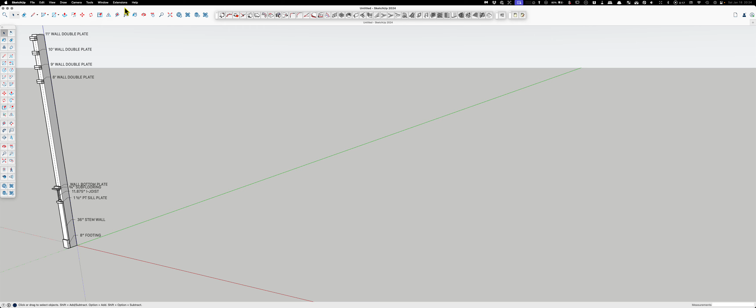I wanted to show how powerful Sketchup is because I ran into an interesting scenario the other day. Let's just build it and we'll see how long it takes. I have no idea what this will take.

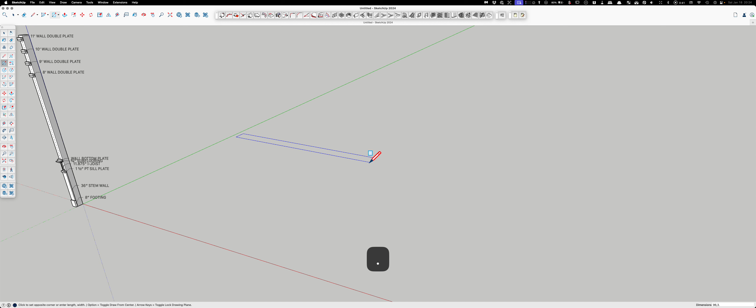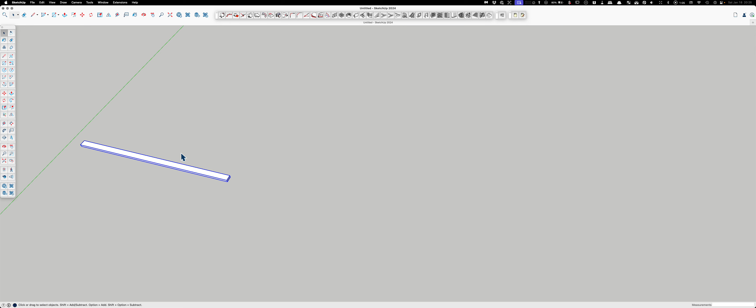Let's go like this. I want this to be... so I'm drawing a wall this way. And then there was another, let's see, let's do it this way. Maybe I can do it this way. From this point here, I need 3'8".

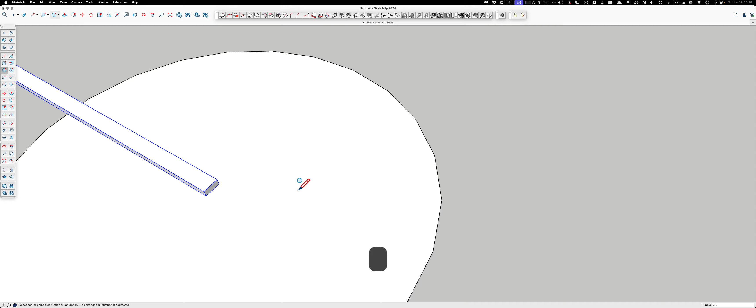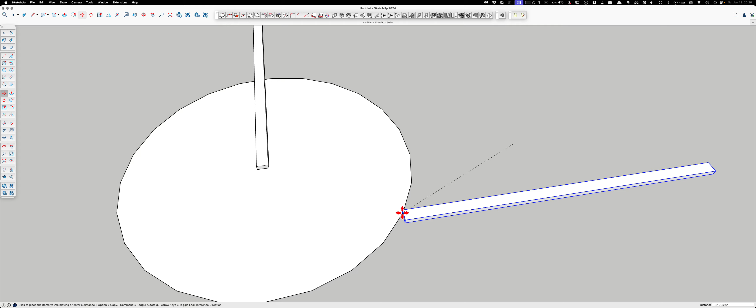We're going to delete that in a second. Yeah, the difficult thing was this was not a 45. So,

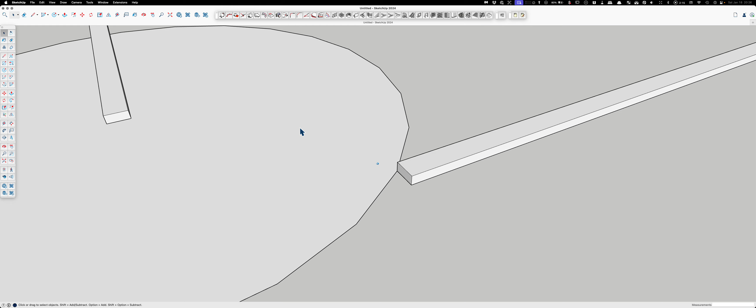Anyways, we're going to do that. And then do a rectangle. Let's see. Actually, I need to do it like this.

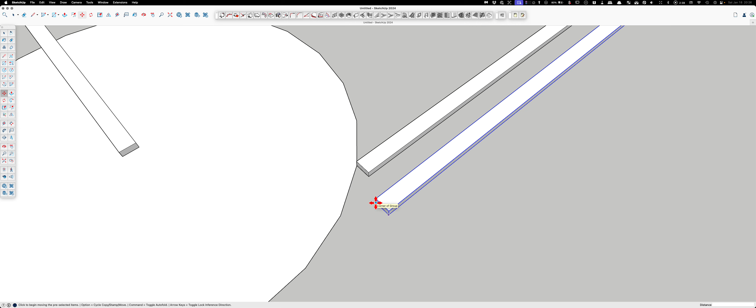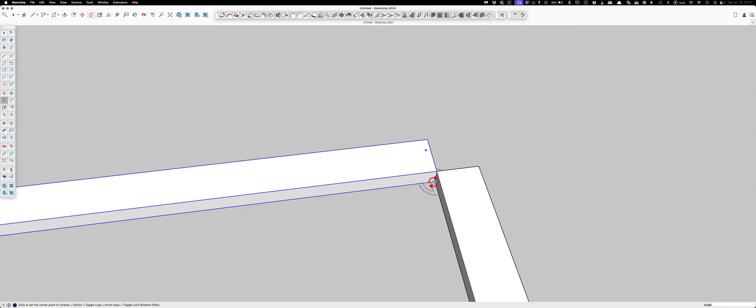I think I can get rid of the circle now. And we'll do Q for rotate up axes. Okay. I think he went this way.

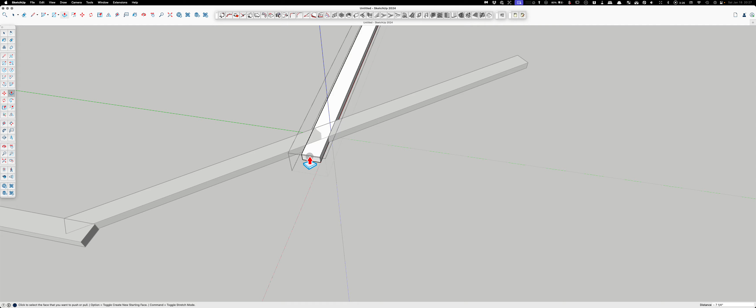By the time I was able to get to work, I had used Sketchup to solve this problem, but I didn't know the actual length. So, Medeek trim. I'm going to try and reproduce what I did. It worked out pretty good. I just didn't know the actual length.

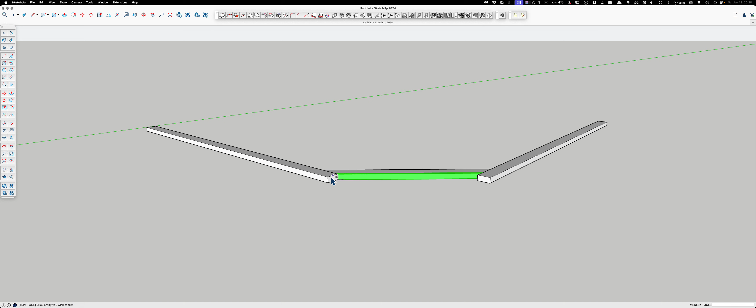I like this tool, Medeek trim. There's that. Okay. They needed 3'8" for a door. So what made this difficult was

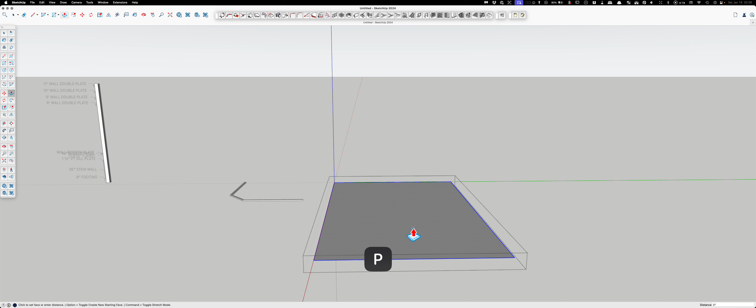Rectangle. G. P. This is under a sloped ceiling. And even it is a strange angle.

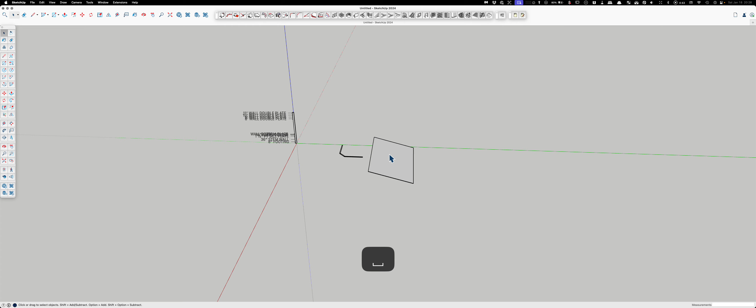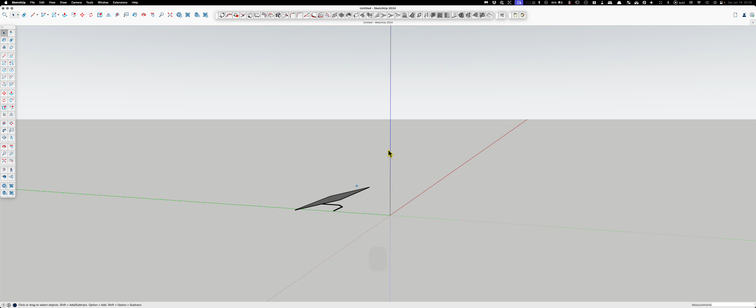There's that. Can't remember. I get used to Sketchup doing, what do you call it? Spacebar to disconnect. And there we go. You know what? I don't need all this right here. And I don't really need these axes.

Okay, we're going to move this upwards. I don't know, say about there. And we're going to leave these plates here.

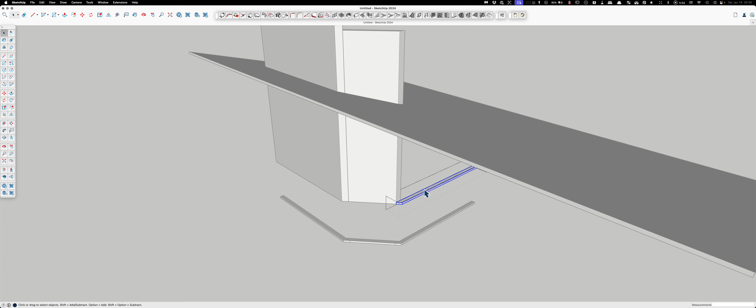This is where the magic happens. Medeek trim. Medeek trim.

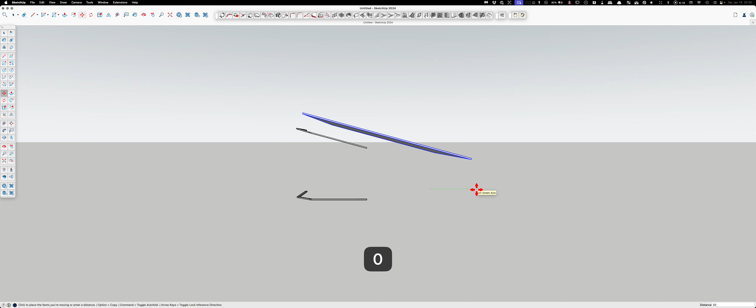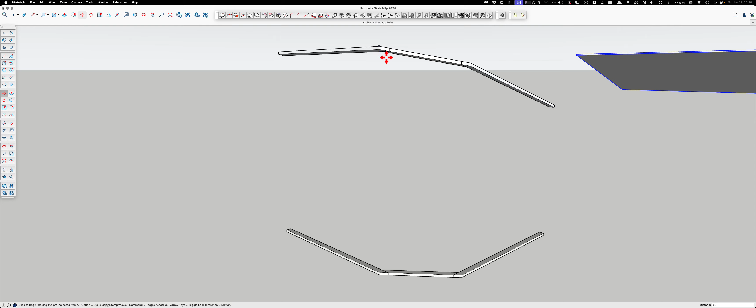I'll keep this around, so what I'll do is I'll just move it this direction 50 feet. So the studs would come up, and I was able to get the exact angle, and this height doesn't really matter right now. What matters is I can do a point laser from there to there, and then I know the compound angle. But

Like for example, let's check this out. Copy. We're going to lay it down over here. V.

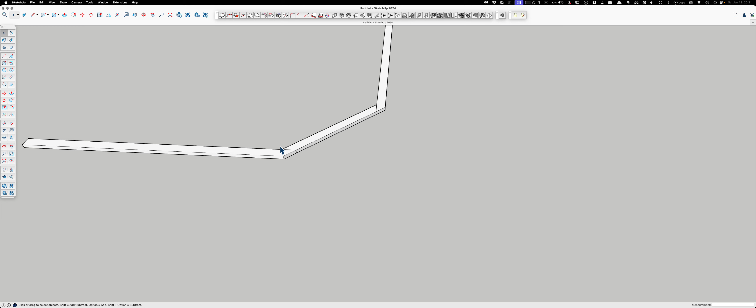And so I need to straighten it out. So I'm going to go... okay. I'm going to go Q.

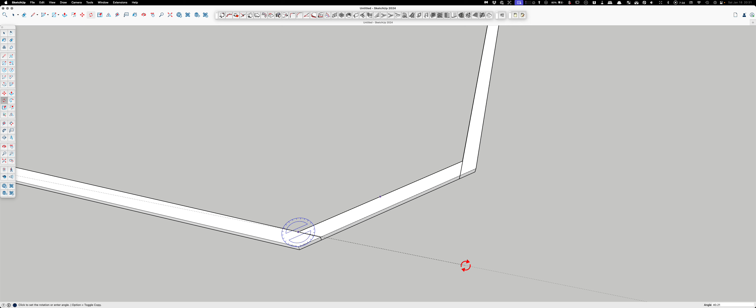Okay, so this is now rotated in that plane. Now I need to rotate it. Let's see.

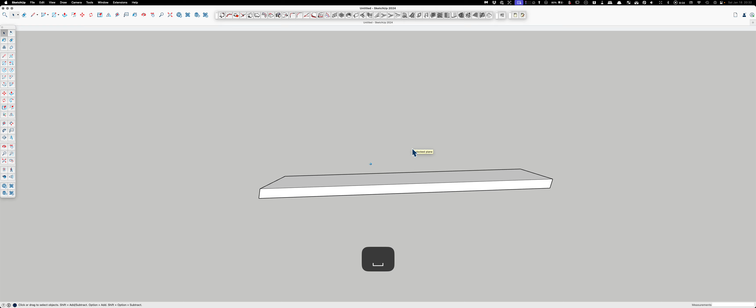Yeah, yellow or green. Looks yellow to me. There, now I think, look as I look at the horizon. Yeah, so it's flat. And now I just got to flatten it this direction.

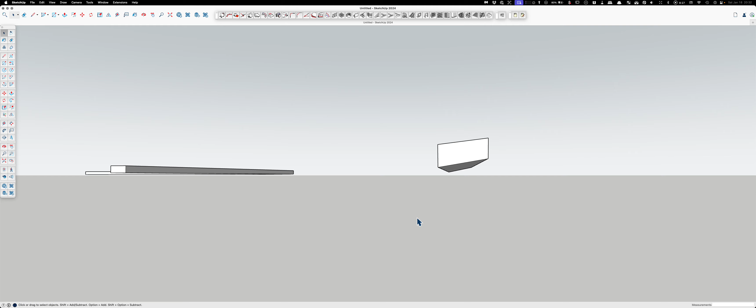And the hard part about this, let me think, how did I do this last time? Yeah, hang on. You know what I did? I think I drew a line this way.

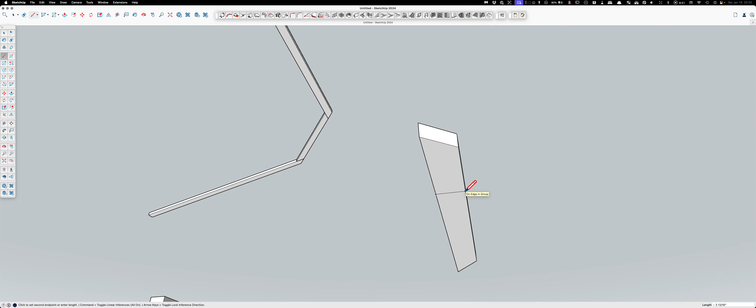See how it wanted to go yellow? Whoops. I can't tell if that worked. That's not what I wanted.

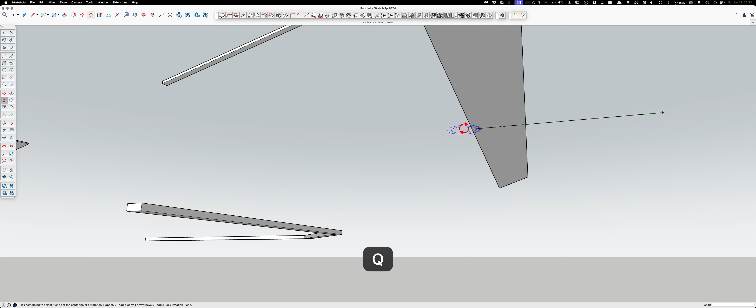So let's do Q. Let's do this object Q. We're going to do, well, not green.

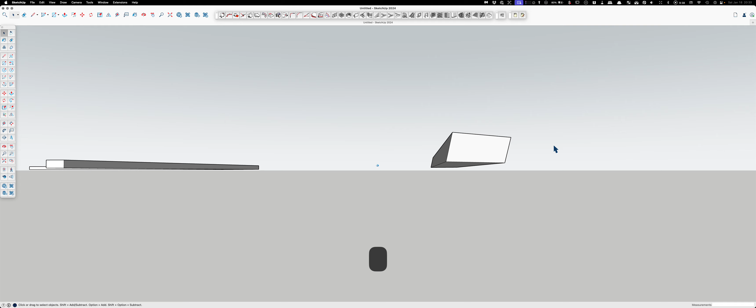I think that's how you do it. So now I have this board laying flat on the ground. And then what I did was I made a rectangle. I think I made just a big giant rectangle.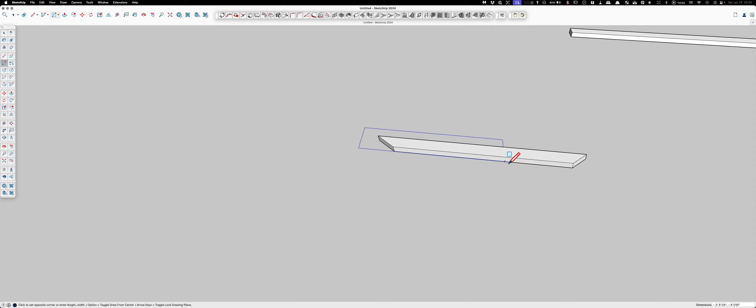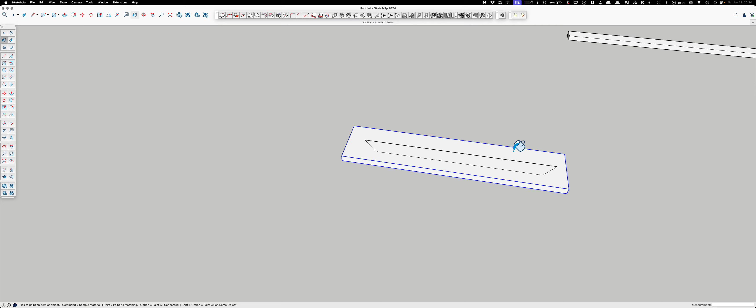Yep, and then push pull to the top. 1, 2, 3. G. And then I wanted to see what it was, so I went to colors, something like this at this.

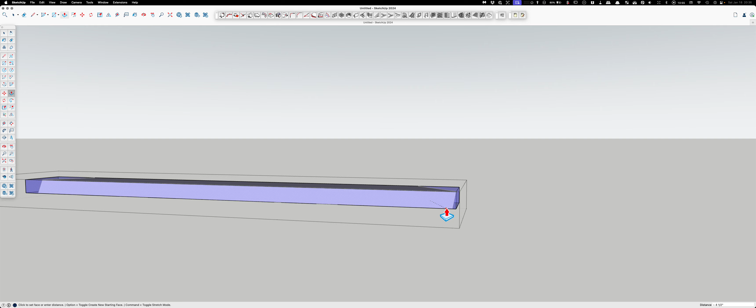So now I can see inside. Yeah, so that's perfect. So now I can go to there, to there, there.

What I'm trying to do is start with a rectangular piece of wood that I would be able to take to a saw and cut. There we go.

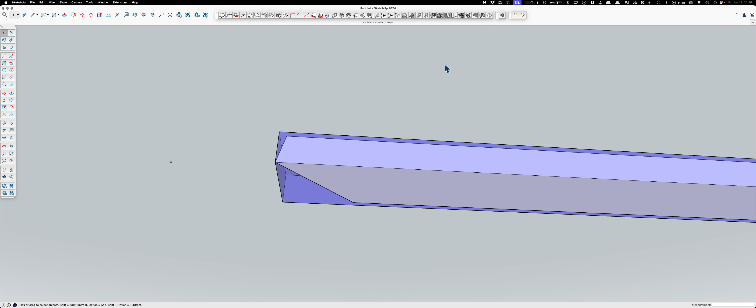So that custom piece is fully encased in this bluish thing. And then

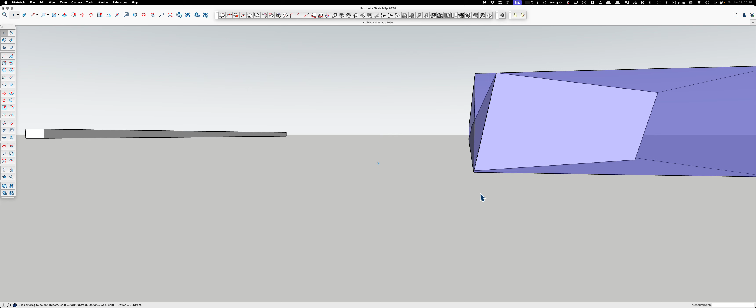I was able to figure out the rip angle. So what that would be is a line from there down to this corner. And as you look straight down the edge, that lines up. There's an angle tool.

Oh, brother. And it wasn't in Extensions. Oh, I know what it is. It's the protractor.

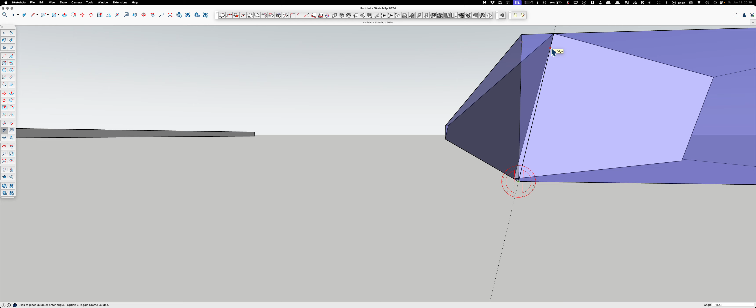Yeah. You go here, here, and then you come over here. So that's 11.48 if you look down in the bottom right. So we'll go check the other side. This would be the angle you would put in the table saw, 11.48.

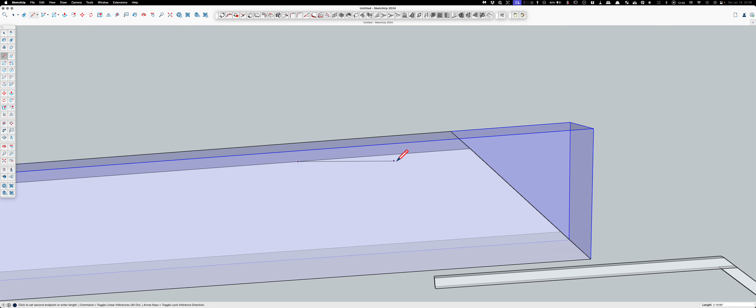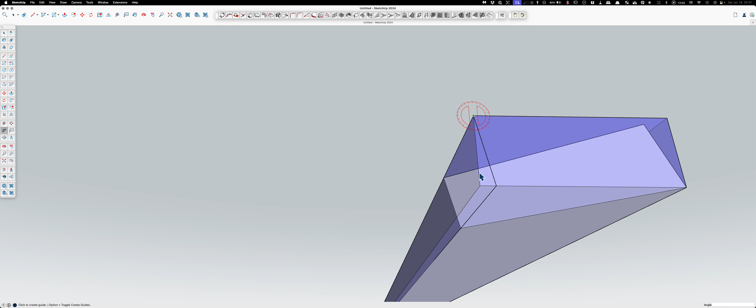All right, so I went into X-ray mode so I could grab that. So then I can go line from here to there. And then I can do protractor.

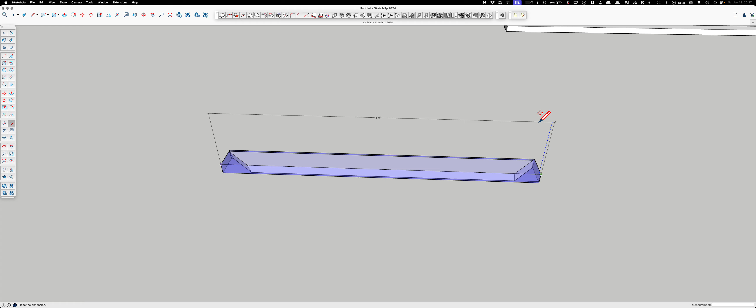So 11.48. So that's going to be what you set your table saw on. And you might as well cut yourself a board. Let's see how long this is.

So grab you a board that's like 4 feet or bigger and run it through the table saw. And you'll need to start wider than this because when you do these parallelogram, you can't just grab a board that is only this wide, 3 7/8. So you'd have to set the table saw at like 4.5 or 4 3/4, and then tip it over to 11 point, whatever that was, 11.48.

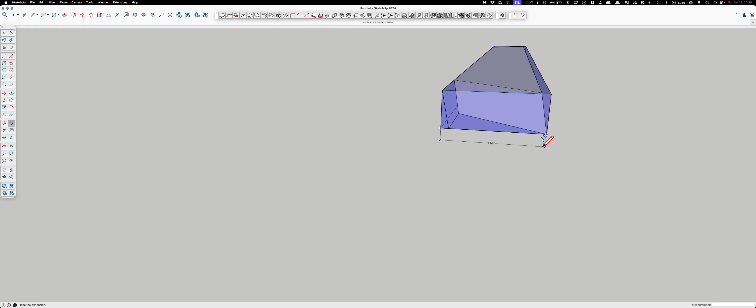Run it through, and then flip it over and dial it back to 3 7/8, and then it would work. Actually, I don't even know if that's correct. Hold on. I think it has to be this one. I don't know if I'm going to get a dimension here. 3 9/16. That's more realistic. I think that's what it is.

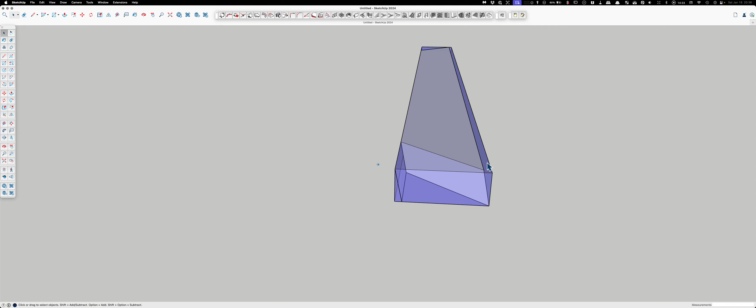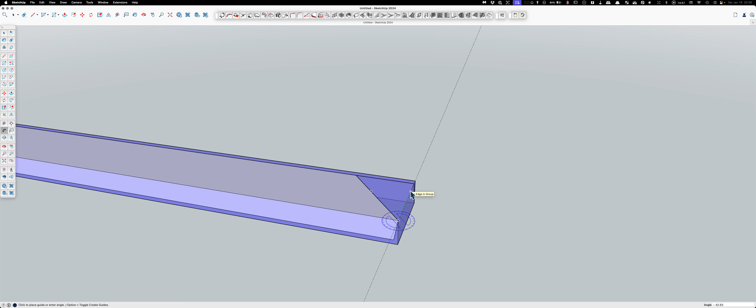That's the only trouble with the Space Mouse, is it's a little herky-jerky.

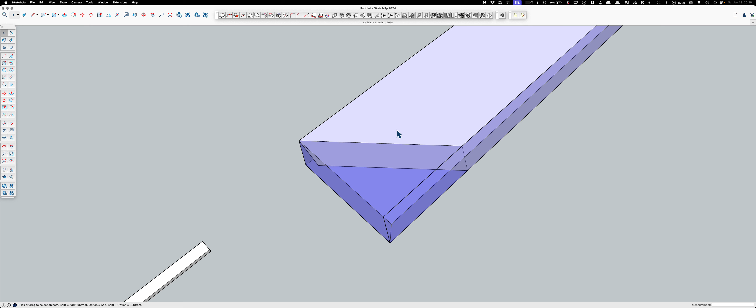X-ray. Line tool. Okay, there's that. Then I can go line from there to there.

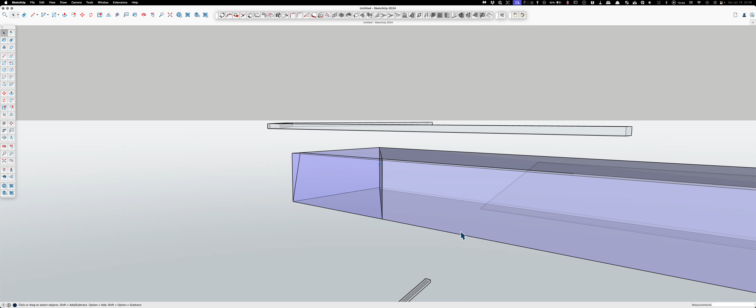Man, does this even have a... You know what? Why are you doing that to me? Yeah, it's got some kind of bevel. Maybe. No, not really. Look at that. When you line it up with the true corner, that's a square cut. What does this side have? Yeah. Man, this Space Mouse is just acting crazy. Let's do...

Oh, you know what? It is going to be a square cut because I know what happened. So yeah, the first time I did this, I tried to do a miter cut 22.5 on the floor and then match that with the ceiling with miter cuts. And so there was some beveling going on. But I'm actually... What, am I upside down? Yeah, there we go.

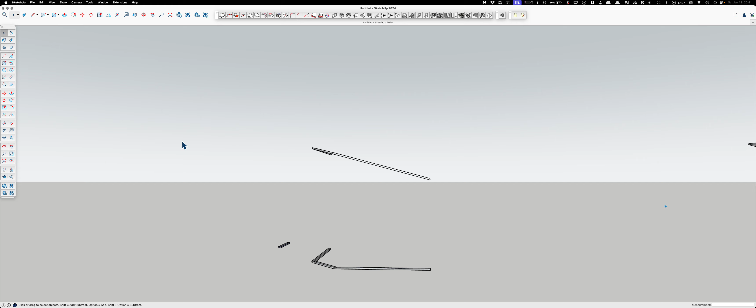So that's got a bevel there. Yeah, this one's got a bevel.

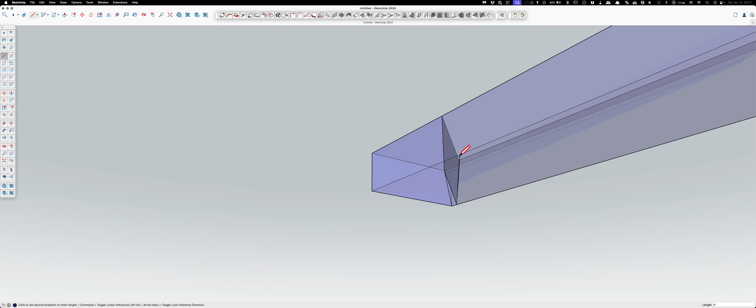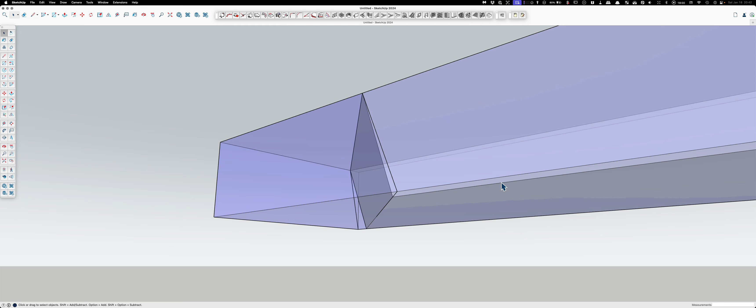Let's do X-ray mode. Line. Whoops. There's the problem. It can jump from being like, look at that, it's so aligned, it's perfect, and then if you don't pay attention. Okay, so now I can draw a line from there to there. And I can draw a line from here straight down.

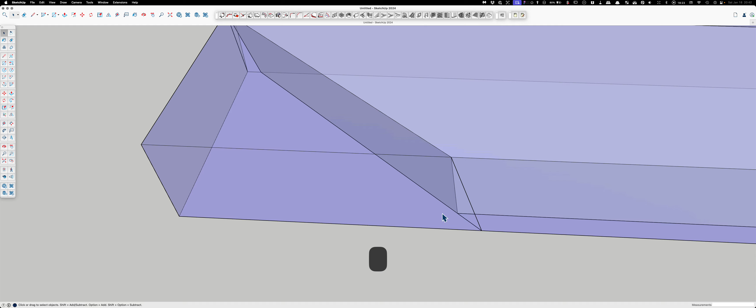That's not straight up and down. Very weird. Line tool straight down. There we go. Now I can do protractor.

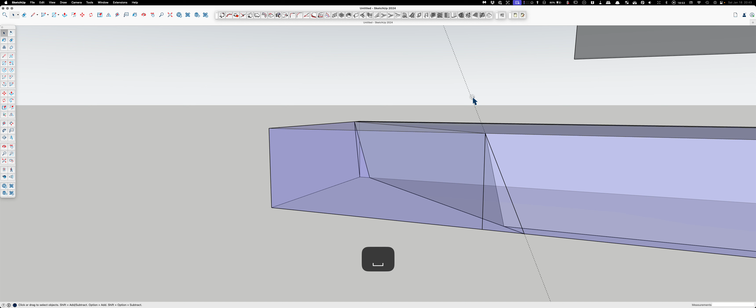22.15, huh? How'd that lock in? That's cool. I'll try it again. At 22.15. So that's that bevel.

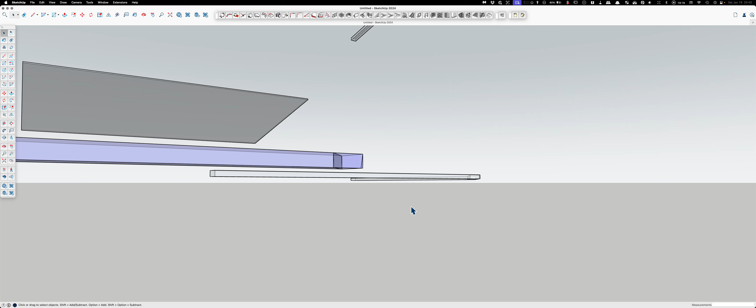Oh man, stop. Holy crap. And I've reset the settings back to factory. Yeah, that one's just a square cut. Interesting.

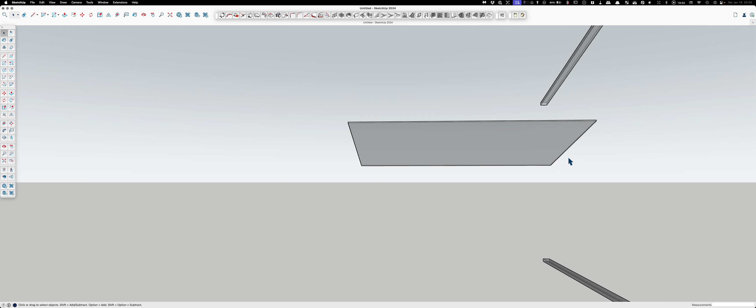That makes sense though, because it's intersecting with the one that's riding down the roof. So that should be no bevel there and just a little bit of a bevel there.

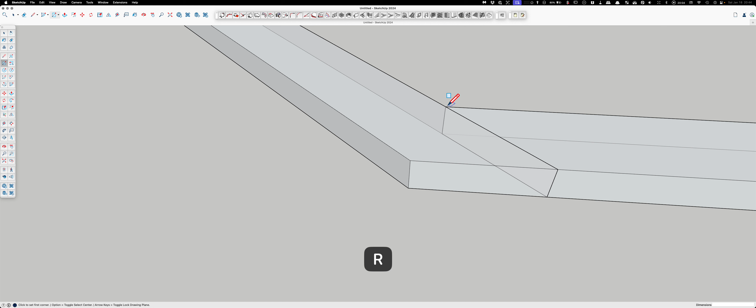And then the studs went like this. And what you can do is write those numbers down, and then I happen to use Chief Architect, so I was able to build a pretty good looking bubble note thing. So it worked really good.

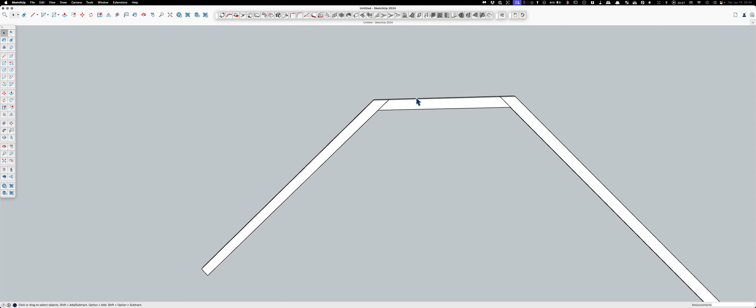G. And then we're going to use Medic Extend. Oh, I wonder if it's going to work. Medic Extend.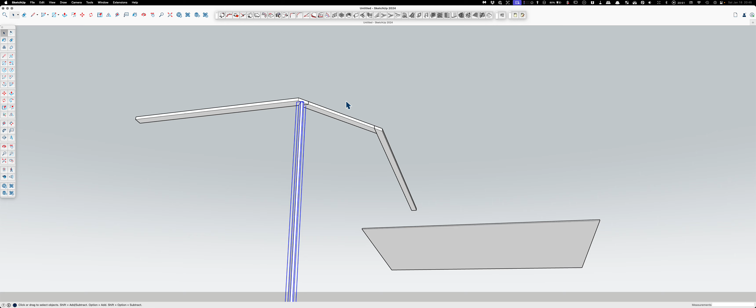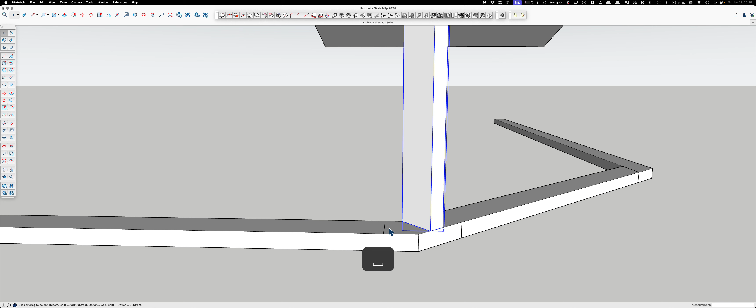What if I should show how I like to do my corners? 1.5, comma, enter, push, pull, 1, 2, 3, G, Medic extend. So this will just be an angle at the top.

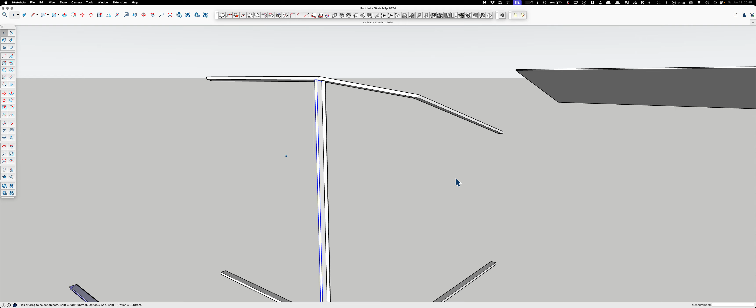This will be a compound angle and bevel. And this over here will be all that noise you hear in the background, the fan noise. So that's a space heater.

1.5, comma, enter. Push, pull, 1, 2, 3, G. Medic extend. So that'll be a bevel of the roof angle, 1550.

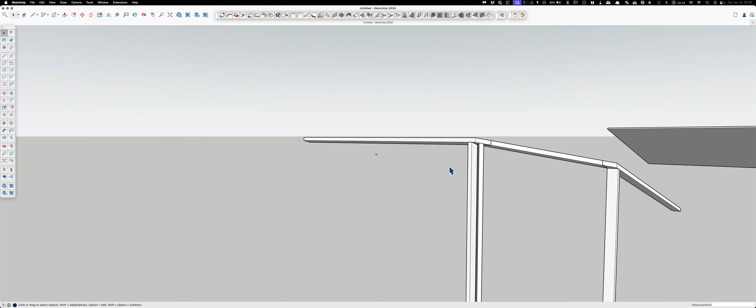This will be, so yeah, that's what I did too. Go like this. I know they say never, don't do copy and paste because it's hard to locate where things go.

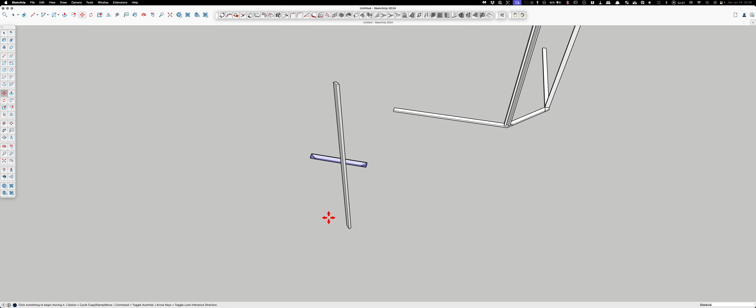So I want to rotate that to be a flat board again, so I can do some dimensioning and angling. So I'm going to click on that, hit Q. That's not the one I want. Okay, Q.

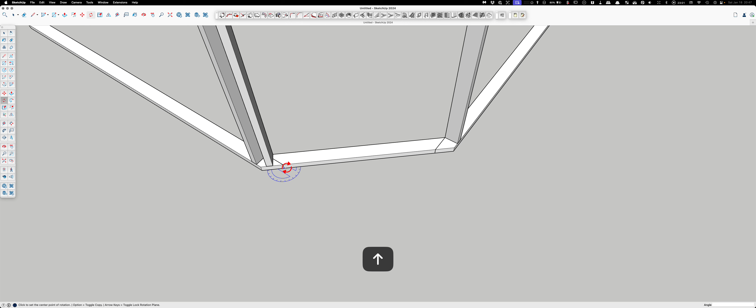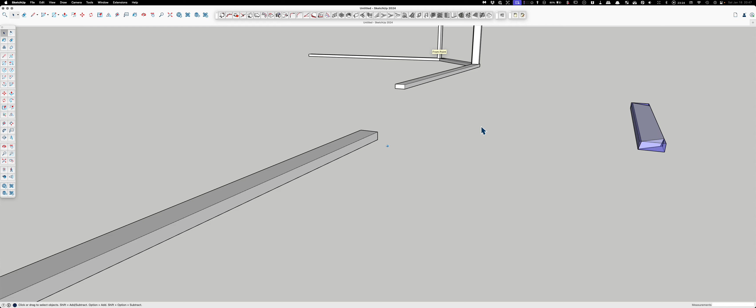I want the vertical reference, the blue one. This way. Okay. And it's already 90 degrees up, so we're going to go Q. Like this, like this, like that. Yeah, so it's flat.

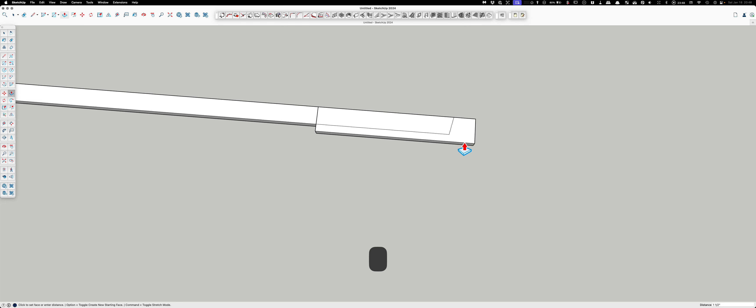And then I think what I did was another bounding box, rectangle. And then we did the B command, steal some of that color, put it here. Nice. Probably don't need to do this step, but for me it helps me to visualize what I'm doing.

Alright, so this bevel will be protractor. Come on now, protractor. Yeah, we want yellow or green or whatever. So that's going to be a bevel of 10.49.

See what I mean? I don't understand why this Space Mouse is acting so retarded.

10.49, and then we're going to do protractor again with the blue from the bottom. Come over, boom. 11.67 on the angle on the actual rotating deck. 11.67, and then on the tilt over it's 10.49 or whatever.